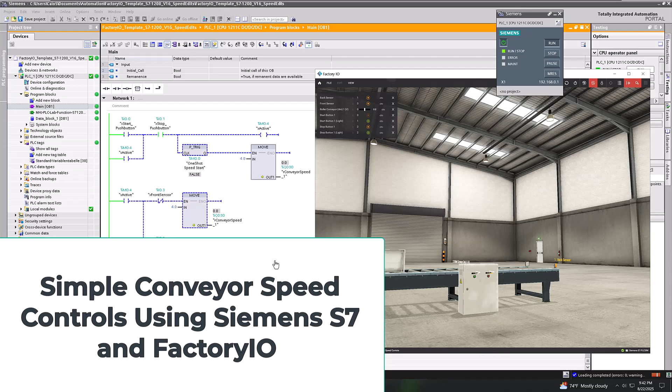Alright, so in the last Siemens video, we had the controls a little bit different, and I wanted to clarify what I had. Again, I told you in that video it wasn't really optimal, but it worked. So now I have the active, the push button start, and the stop in series together. And then the active will seal that in as a seal-in circuit.

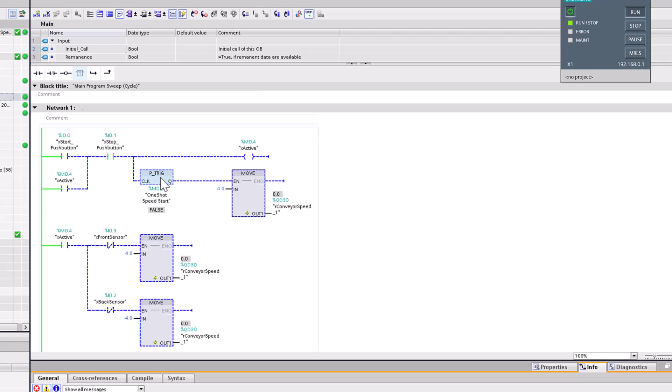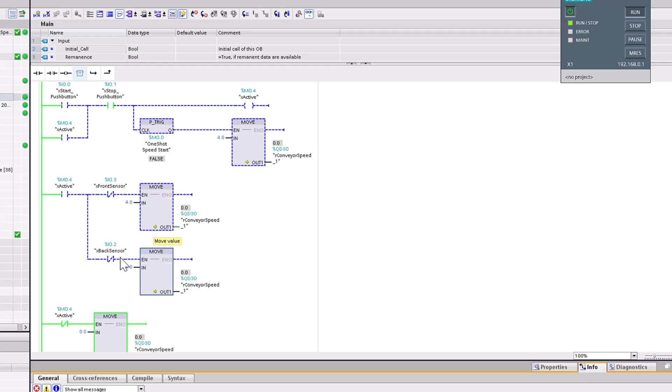But also, I put a one shot in here so that it will give the actual conveyor an initial start speed, and then down here, as it's active and a sensor is made, it's going to change from forward or reverse, which is basically just giving a positive or negative push to the conveyor speed. If it is not active, it will go to 0.

Now I'm going to show you this actually running so that you can see this for yourself, and this is being simulated, and we'll set that simulation over to the side so that it's not in the way. And let's see if we can drag this out just a tad, give it a little bit. Now with me reframing it, it probably takes a little bit of time. And FactoryIO is a little bit different in its own self. It doesn't size. I mean, the graphic thing is a little bit low on response.

But anyway, what we're going to do is start it, and you see the one shot happened. It gave it a conveyor speed of 4. And as soon as one of these sensors is made, it's going to go the opposite. So the back sensor right here, as soon as it's made, it's going to back it up and go to the front sensor. And as you see, this is back sensor, this is conveyor, and this over here is the front sensor. So I can easily come over here and show you that.

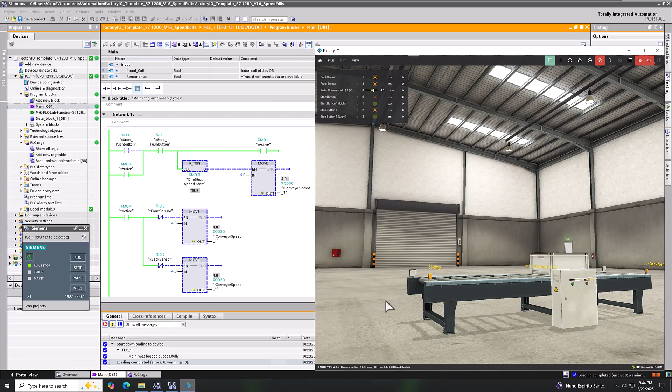That's the front sensor right there, right? And if we wanted to, we can give it a better view. This is the front sensor, this is the back sensor. So you can see where this would cause it to run backwards, a negative command, and then this would cause it to do a positive. Now again, if I stopped it, it's going to give a speed of 0. If I start it back again, it will start back in a positive because this one shot right here will trigger and give it a speed command.

You can watch that happen. If you watch the screen, I'll press the button and you see that did happen. It's a split second because obviously it's a one shot, but that is what is actually happening there.

Now again, setting all this up, if you haven't seen the setup of it, originally this does not come with 2 photo eyes, and it does not come with an analog speed for the actual roller for this exact scene if you get it directly from FactoryIO. I did actually add some stuff, and I showed you how I added it in that prior video.

So if you do have a question about that, you can go back and watch that prior video. It's maybe 1 or 2 videos back from this one, so it's not too far back. Or you can just go into the search bar of the channel and type in Siemens, for instance, and all the videos that are titled Siemens will pop up.

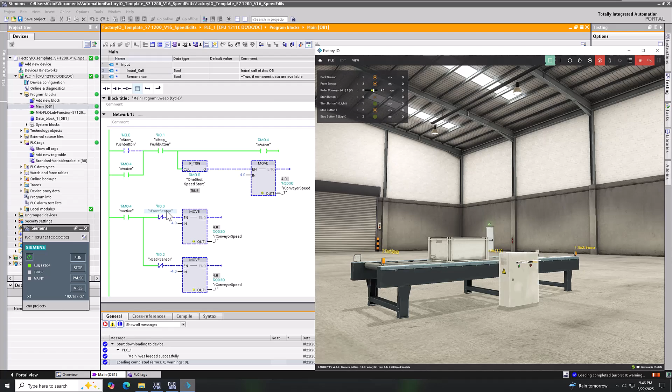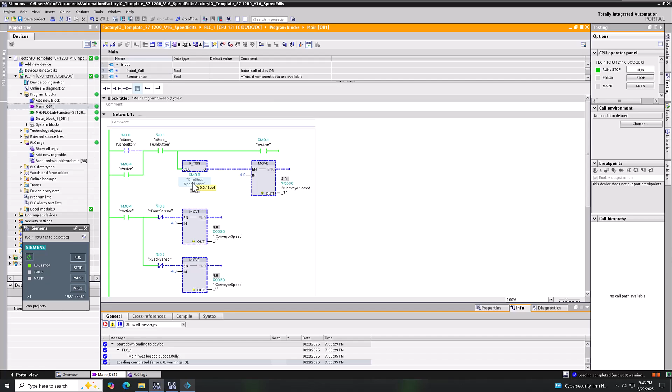The one shot, if you do have a one shot, I will tell you the way to add that is, you want to go in there and define the tag. When you define the tag though, make sure it is a memory tag. It's not just a tag that you make as a temporary, because you can make this as a temporary tag. Make it as a memory tag so that the one shot works correctly. Because if not, it will not work correctly. The one shot will stay active as if it is not a one shot.